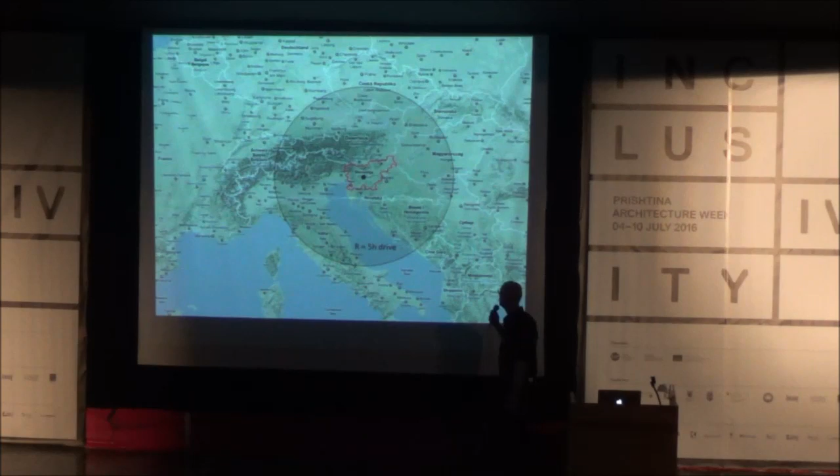We are a very small architectural office in Ljubljana. Tina is the one with the red hair over there. This is something I need to share every time, to understand that we are located— Slovenia is located in Central Europe, heart of Europe, but kind of in between East and West, and also between South and North. So it has a lot of different influences, a lot of different cultures mixing in Slovenia, and I think this is something we all benefit from. It's also one of the reasons— there's this kind of circle with a 500 kilometer radius that you can drive in 4 or 5 hours, and you compound this cultural milieu of Central Europe. So Slovenia, in the end, is a very diverse country, ranging from Alpine to the Adriatic Sea.

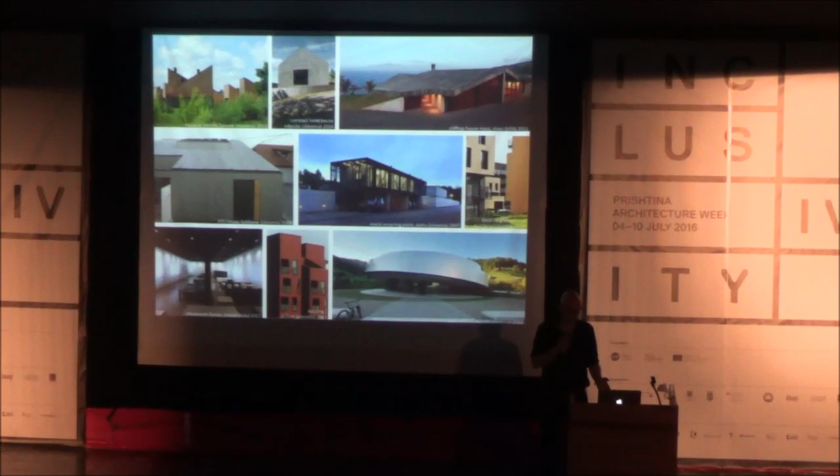If I want to note down the focuses we use in our work: we primarily do design by research, and also research by design. We believe there are actually no standard situations, so therefore there are no standard solutions, and we constantly ask ourselves how to challenge the obvious and how to act beyond the standard. Christian Schittich, the chief editor of Detail, interviewed us a year ago and spoke about the diversity of our projects. He pointed out that this is due to the context—each time we interact with a certain environment, we find a completely new set of conditions, due to a larger or narrower set of contexts. That's why our architectural production, one slide per project, doesn't follow one formal line somehow. It is very diverse, precisely due to that. But what is the same every time we interact with a project is that the process of thinking is somehow the same.

It's our own way of working. We use Sketch as a tool for thinking, but not Sketch as a representation of certain architecture or certain spaces, but more as a diagram, a graphical description of what architecture has to do, or what we are thinking about architecture.

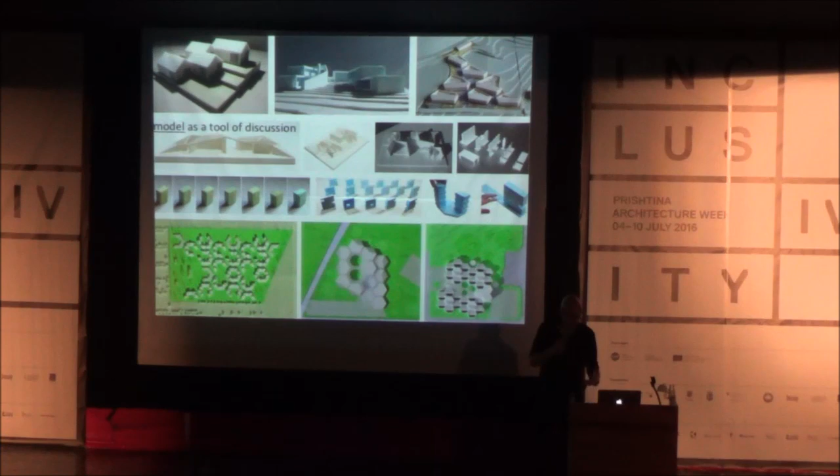The other very important tool for our work is physical modeling. Although we do everything digital, a physical model allows one special thing, and that's discussion. Since we work as a couple, privately and professionally, there are other people with us in the office, so mostly we work in teams. Architecture is thought and produced through discussion, and having a model is a very useful tool for creating that discussion.

The other focus is the user, where we see spatial organization very much linked to social organization. Architecture without the user would not exist, the same way a good book does not exist if nobody is there to read it. So we strongly believe that user experience and participation are our essential objectives.

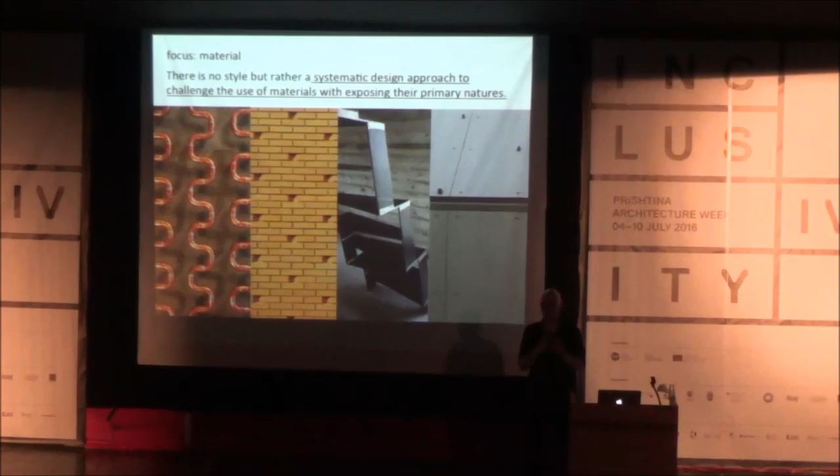The topic of material is very important. I think that was also felt in the context of Ljubljana in the previous presentation - everything you do, architecture is very haptical, so everything we do at the end has some kind of material manifestation. What we do at the beginning of each project, we don't start to think it white, like the modernist would teach us.

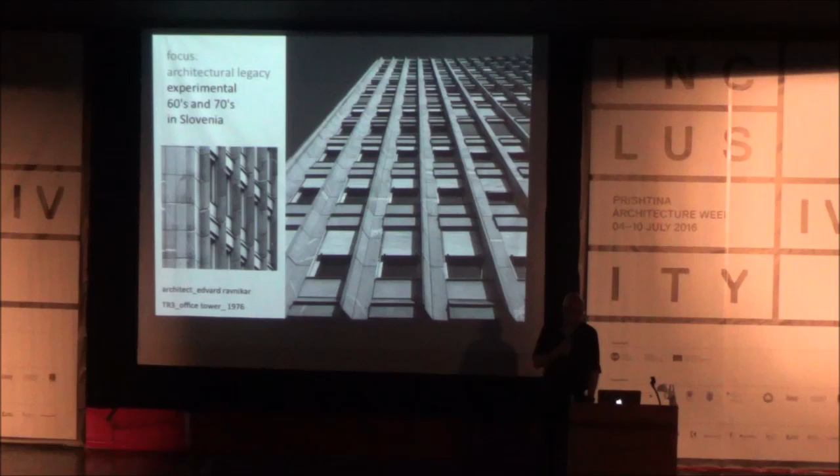Ravnikar is the most prominent representative of that, and as already said, and my slides are overlapping, you can track this facade being as a curtain, simply said, back to the Vienna School and Otto Wagner in Postsparkasse, where you can literally connect to Gottfried Semper and the understanding that architecture can be represented as how cloth works into architecture - this Stoffwechsel theory.

Or for instance another project of Oton Jugovec, which is clearly a modernist building, but done out of absolutely traditional materials in terms of the wooden beams and the hay used for covering this roof. But the structure, the conception of the structure, is absolutely a contemporary thing. So that's quite interesting and brings the notion of Slovenian modernism being a very contextual thing.

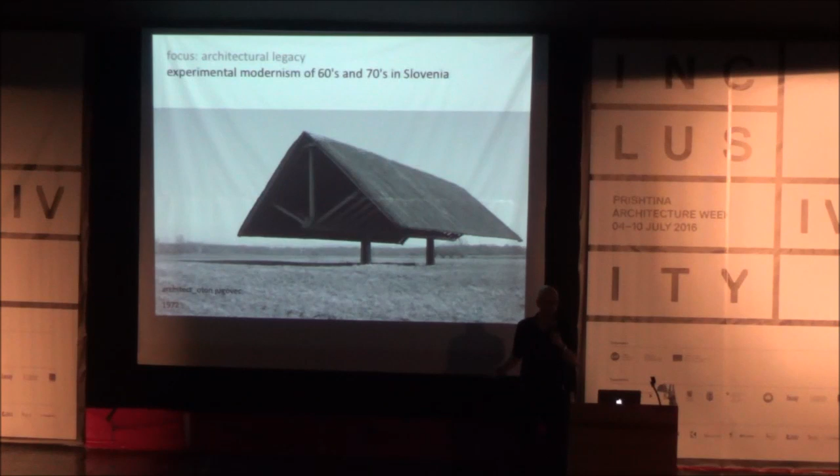Or another one where modernism has set its foot in a way together with the society - Stanko Kristl, who was also one of my professors in the early years of my studies in Ljubljana. He brought somehow poetics and humanity into architecture.

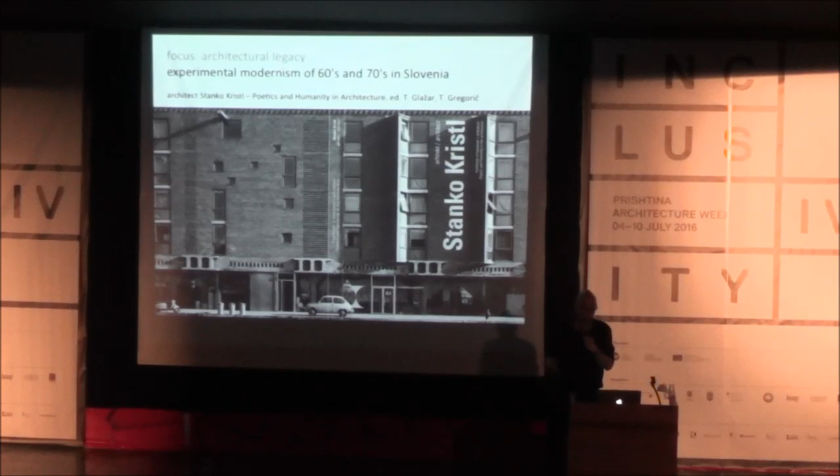Another example of Stanko Kristl, a block of flats in Velenje, where somehow understanding society and how the society works, but also how we feel as individuals towards the space on this kind of psychological level, Kristl was working through that in a modern language.

It was also visible, I think, through the few examples I placed before. Authenticity with materials, something very important. Scope of architecture, relating to the notion that it's from the spoon to the city. And the importance of craftsmanship, which is quite a critical position today when everything we build, we are bombarded with products off the shelf that we're suggested to use in projects, but we still refer to the way architecture was done in that period of time, which was everything related to craftsmanship.

Jumping to the projects, I'd like to briefly show, with a few images, the work we just finished, or that's undergoing - our Slovenian pavilion at the Venice Biennale of Architecture this year. We opened it at the end of May. Tina and I were appointed as curators, and through the office we produced the project.

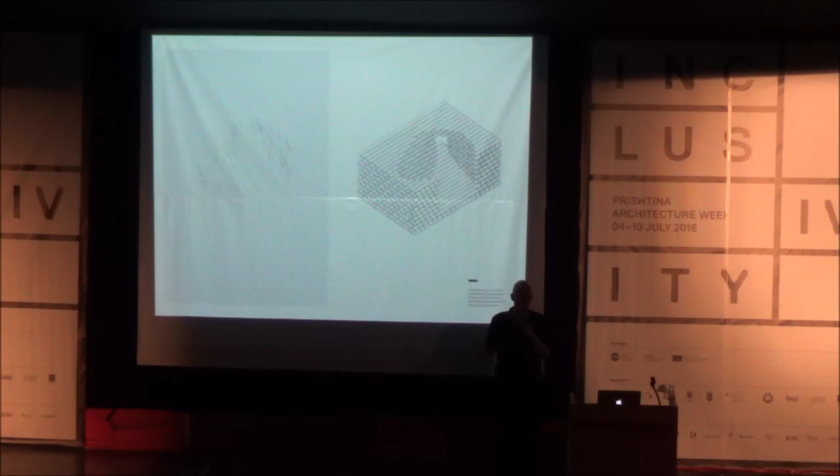The other topic besides curating the content of our pavilion was also, in a way, designing the object that shows the content - that's the other story. This is the wooden pavilion that you see here. Here are the books represented in three-dimensional space, fitting into this cavity.

But this is way too small because it's directly out of the book. What we've done is start to materialize this object that represents the physical presence of the books. We did it by understanding the most basic principle of how you store a book - a simple shelf.

That simple shelf we understood had to be made out of wood, for many reasons, because Slovenia is one of the countries predominantly covered by forest, but also has a strange relationship with Venice - the oaks from the Karst region, the western part of Slovenia, were historically used to erect the city on the water. So there are quite a few relations.

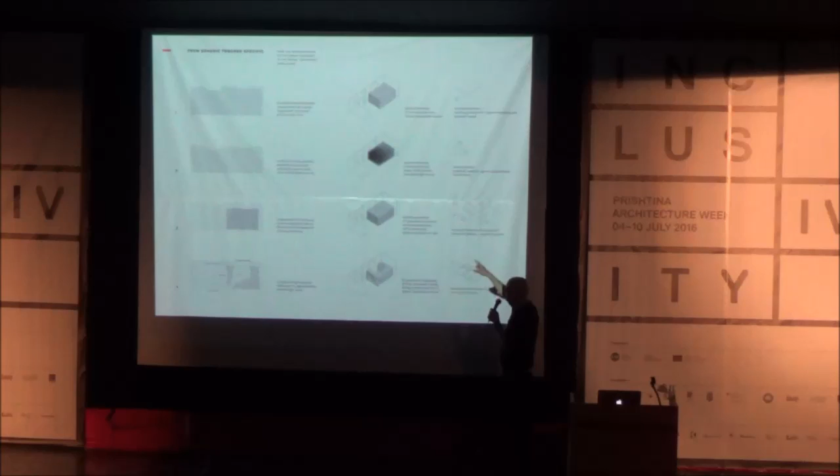We took one generic plank, meant to be the surface to put the book on, and then a vertical piece of wood that creates the space between different shelves. One and the other perform together as a spatial system relating to the context - whether that's the book as an object, or the context of the Arsenale where our pavilion is located.

I wanted to bring in another reference to modernism, or the critique of modernism - a step in between, by Alison and Peter Smithson, in their patio and pavilion project. They stated that patio and pavilion represent the fundamental necessities of a human habitat: the first necessity is a piece of world, the patio, and the second is an enclosed space, a pavilion. This relates to what defines our home.

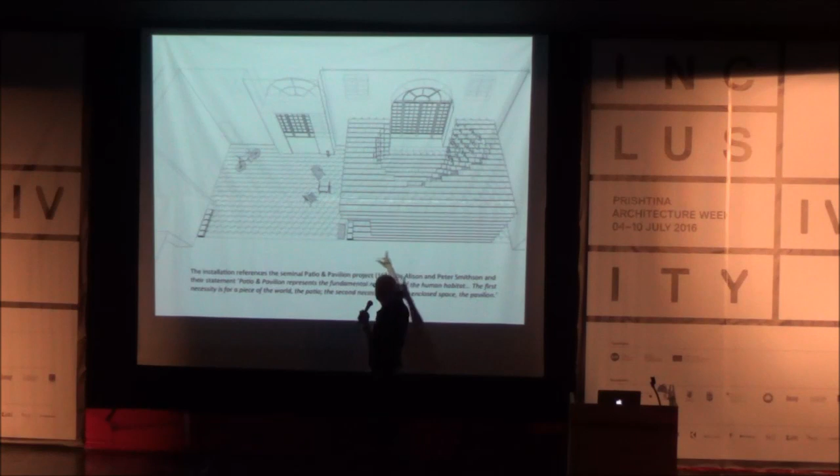So that's what it is there - the patio as the empty space, and the pavilion housing all the books, an abstract representation of home. But at the same time it also directly relates to the window of the Arsenale, although our building, our space in Venice, was completely plastered.

All the walls were plaster, as the opposite of all the other ones, which have these kind of rich materials, the walls out of brick, very old and very expressive. We have had the plaster.

So the first thing that we did, we kind of took this knife and made a Gordon Matta-Clark gesture in order to cut out of the plaster the window, which became our very close and related context. But it's also, in a way, a metaphysical relationship, because we kind of brought the light into it. And then here, maybe you can relate the light to knowledge in a classical sense.

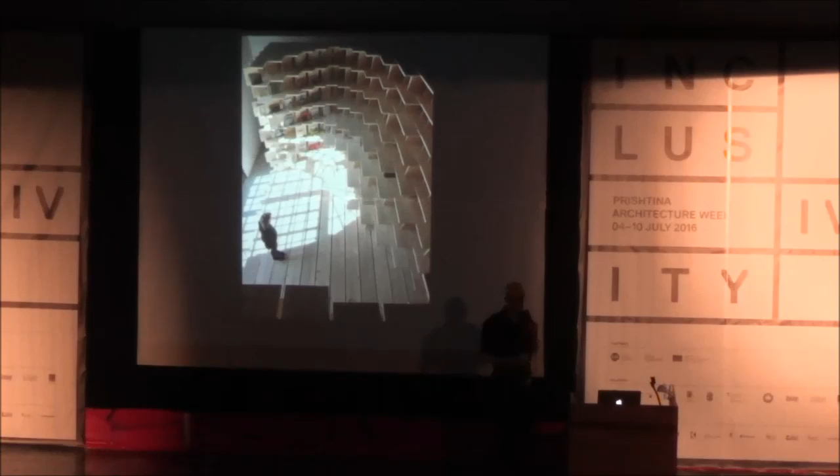So the light literally carves out the space of this three-dimensional pile of wood that starts to perform as a cavity where all the books become this kind of usable library. But as well, the light penetrates through the structure.

Whenever you move around the pavilion, you always see the source of light, because all of the verticals, they're pointing to the way where the window is. So in that way, you have this kind of representation of the wood, in combination with light, which is a direct, let's say, form-generating system.

Into something like that you find out when you go to Venice, and you can sit here in different ergonomic positions in order to reach the book that you want to read and browse through its content.

Okay, that's it about the Biennale, and let's go to the first house. This is the first project we have done together, Tina and I. I think it was built, it was finished 12 years ago.

It is an urban shed, an urban holiday home, in a way a pied-à-terre for my parents in Ljubljana. Ljubljana, in a way, started as a Roman city, and then a medieval city, and so on, also through the Baroque and modernism.

But the situation where we found ourselves is here. And it has quite a strange layout, because this is the structure of the village, so-called Krakovo, and the School of Architecture is over there, on top of this block.

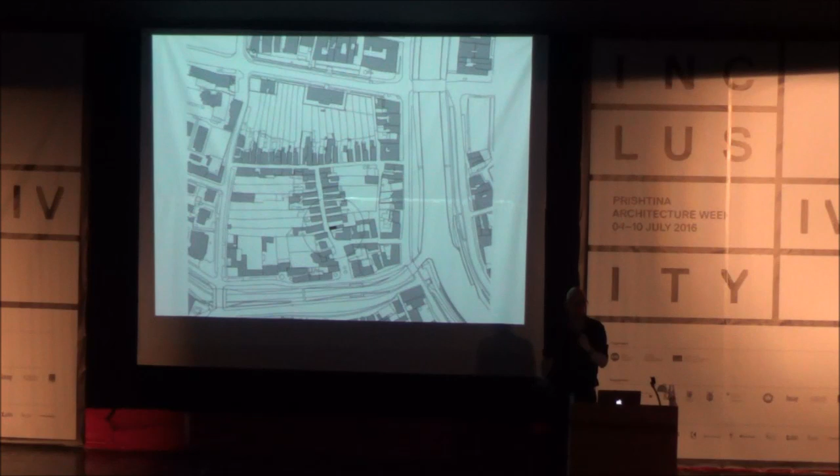So nowadays, when Ljubljana outgrew this situation, this became part of the center, and also the population within this little ambience changed from farmers to city dwellers somehow.

And we were confronted with this kind of situation, although all the neighboring buildings are these old farmhouses, which are protected under National Heritage law and committee. So we were fighting, in a way, for two years in order to persuade the National Heritage Committee.

That we do not need to actually reproduce something which you see on the left, but we can actually tackle our service shed with a contemporary approach in order to bring something much more suitable to the environment, not just a fake reproduction, because this is half smaller than a typical house, and it has a totally different type from the outset, and so on.

So one of the challenges that we undertook was how to bring direct sunshine, the light, into the building, since the service building was oriented exclusively to the north, so no windows on the south.

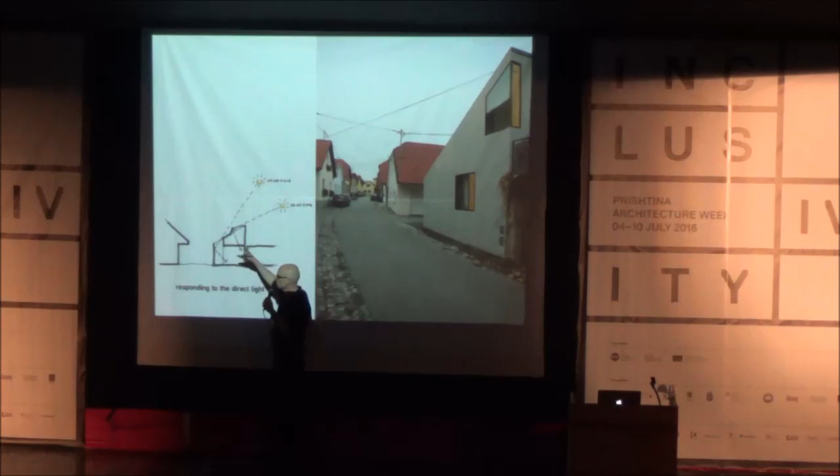And the other challenge was how to actually get a little bit more room on the upper floor, because we wanted to exploit this little volume as radically as possible.

The whole building only has like 42 square meters altogether. So we made the gesture in order to create this bump on the roof.

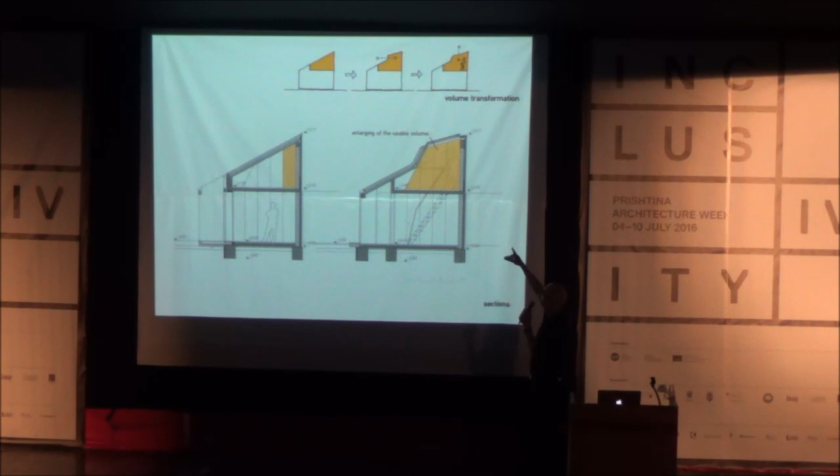But in a way to reverse the typical element that usually is allowed there in order to have more room, but not to have the view as would typically be done, but something which is on the rooftop in order to bring the light in.

So that was the only exception that we were legally allowed to do in terms of expanding the volume.

And you see clearly here the reference of what they allow and how we kind of abused that little extra volume that we got.

This is something we are proud of because we designed a detail of a flush-with-the-facade glazing, which is in a way a very contemporary detail you can see everywhere, but in reality is a quite direct reference to all of the windows of those typical farmhouses that were in this area before.

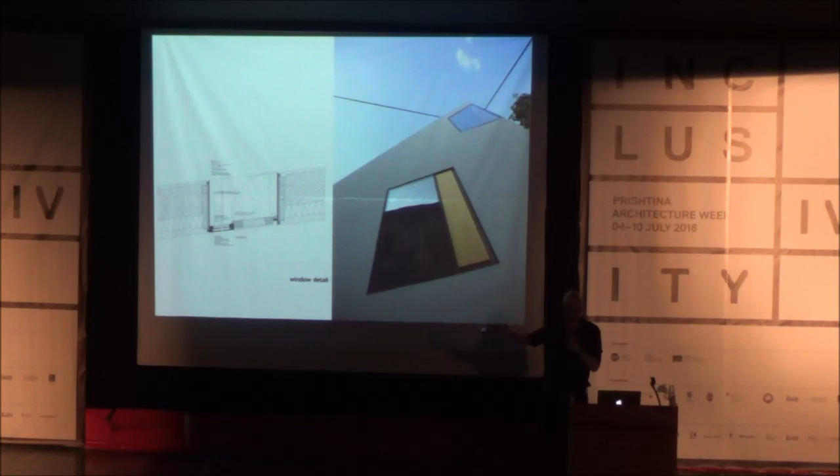Even the window you see here in this reflection has been changed 5 years ago with an off-the-shelf plastic window recessed inside the volume of the building. So in a way, now in the historical area, a contemporary interpretation is the only memory of the windows that used to be there.

Interiorly, as this was our first build project together, we have been very careful about what we were using as materials. From exposing the concrete where it was structurally needed, to using terrazzo flooring as a reference that we are in Ljubljana, still on the Mediterranean.

My parents are from the Mediterranean part of Slovenia. But also understanding how to bring the staircase inside, since it's a very small room and we needed to access the upper floor.

The staircase was very short and steep, so we used this situation, sort of samba stairs, that we actually found a reference in Plečnik's St. Michael's church that Vlado was showing in one of the slides.

But at the same time, the staircase is not something which would be purely a service element, as you know, the tool to come one floor up, but it also plays this kind of sculptural role.

And as we were educated by our professors, who were still deeply rooted in modernism, we were thinking of these stairs at the beginning totally in white. Only when we came to the workshop where this craftsman was making the staircase did we understand that it would practically be a crime to paint the staircase white, because the design would still be there, but all the notion of how this stair was made would be completely deleted.

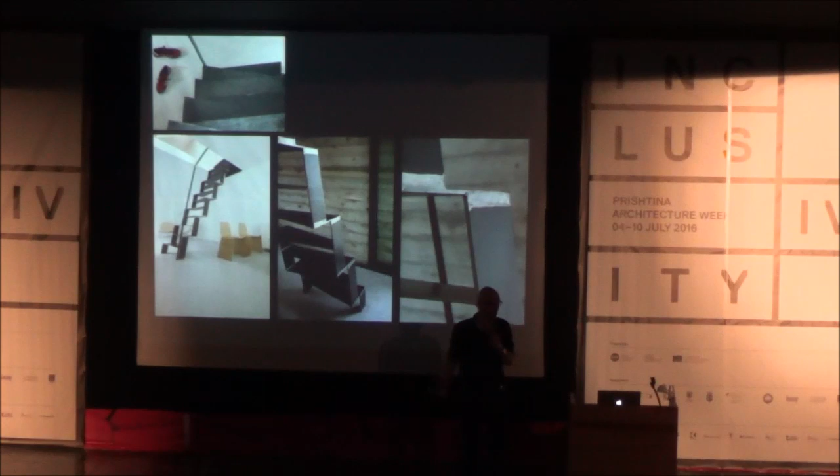So it was maybe our first epiphany, in the very beginning of our career, that the material has to play an equally important role as the form, the function, and so on. So you clearly see how the stairs are done.

And then we experimented on the upper floor using simply plywood, a very cheap material, just screwed to the floor. And we have been doing quite a lot of elements of the interior with the same material, using the terrazzo which is on the floor also for other elements like the sink and so on.

And yeah, this building was, for a few years, also an afternoon kindergarten for our son, who is there on the picture.

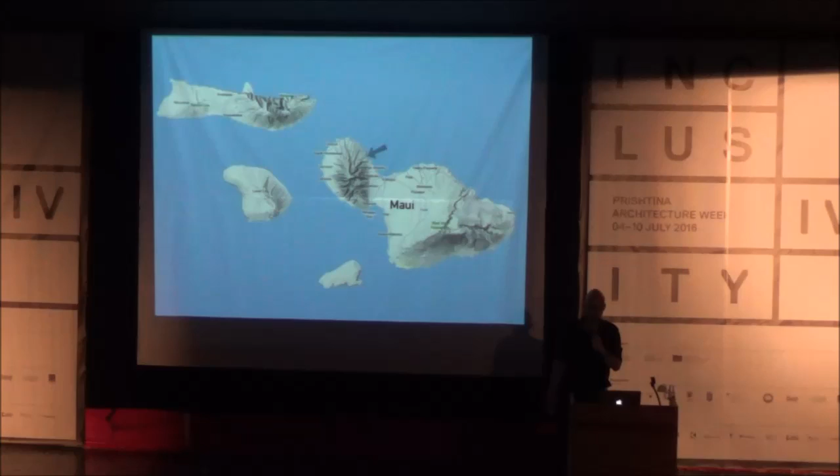So now we are moving to a completely different part of the world, which is 12 hours time difference, on Maui, the state of Hawaii in the USA, where on the north shores of Maui we had an opportunity to design a home for friends of ours. This is Robert Stroj, half Slovenian, half Croatian, raised in Zagreb.

But then, due to the political situation, people from my age who were either in Croatia, Serbia, or Bosnia kind of fled away. And he went into the world. He was a very good windsurfer, and he started to work on windsurfing sails. Slowly he became better and better, and nowadays he's running a research and design studio for NeilPryde. And of course he has to be in Maui, and that's practically his office somehow.

So what we got from them was a reference and a very short brief of how many spaces and what they really wanted. A very short brief, but this reference was quite important for us — the Walker residence in Carmel, by Frank Lloyd Wright. One of the things Robert emphasized that was important to him is that the floor plan is not a set of orthogonal walls, but something that creates a different kind of spatial dimension inside the rooms.

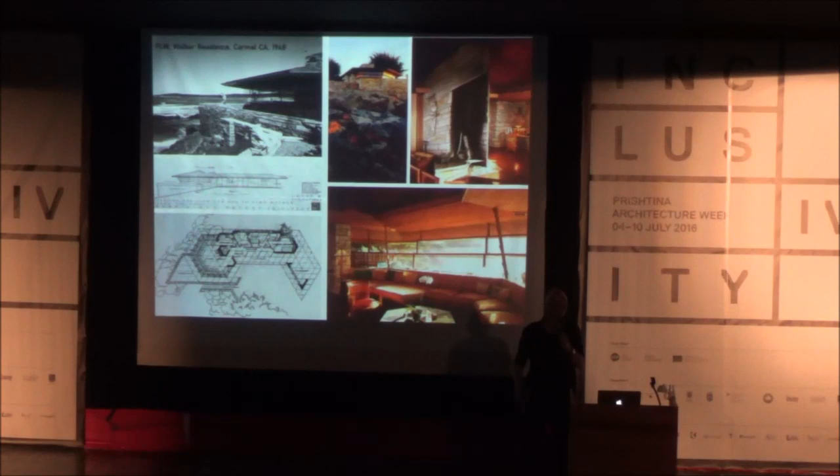So that was the site, and we felt in a very strange situation because we couldn't really address how to start the process of thinking. Of course, the first thing we did was go there, because as Europeans we have to understand the context. Although the context was kind of ambiguous for us, because there was nothing built around that we are used to in Europe. But being there, we started to understand that the context, although not visible, is very influential.

And that's actually the wind, the sun, well, all the greenery, how it grows, and all of these things. So coming there, we started with the first sketches where the view was playing the main role, but also a first representation of volumetrics, of how to actually work through the house.

One thing which was pretty obvious is that Maui is pretty much not a very urban area, and all the people are actually socializing at their homes. They do not have squares and pedestrian zones and stuff like that, since it's a very American influenced society.

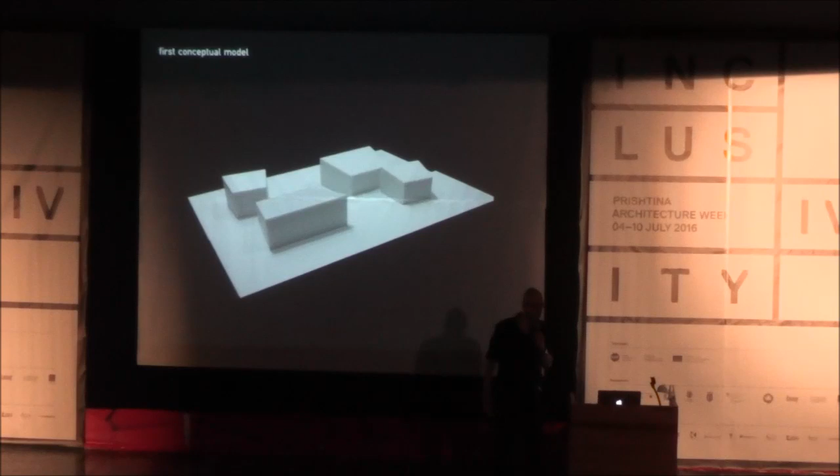So we understood that this home has to also work as a social venue. We started off in a simple bottom-up process to provide firstly the individual spaces which are in complete privacy. Those are sets of bathroom plus bedroom volumes where you can put your really intimate, private functions, and spend private, intimate life in there.

But everything which is in between is this semi-public situation of your normally private home. But at the same time, it's also very fluid space, so the nature can actually go through.

We've been doing quite a lot of experiments with how to fix the roof somehow, because it was really kind of bottom-up process, even literally. And then we figured out that the roof has to play a role of the landscape. But we didn't want to be too literal about it, because otherwise we would just kind of put the earth on top. But the roof, still, it is representation of architecture, especially of architecture of individual home.

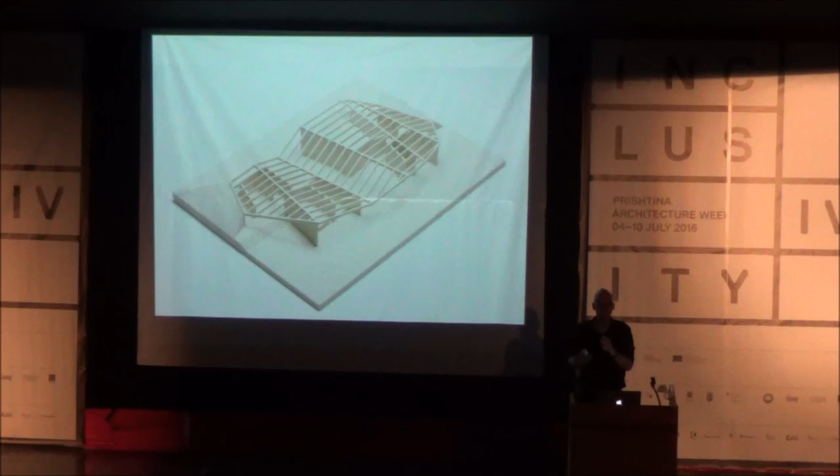So when we go home, we primarily identify ourselves with the roof. So the roof has to be there as an identifiable element. So how this house is working is that it can work as a large home, where you see the master bedroom and two children's rooms.

But at the same time, it also can work occasionally as a mini hotel, where each individual volume works as an ensuite room. So yeah, technically these are the private spaces of sleeping and bathing and so on.

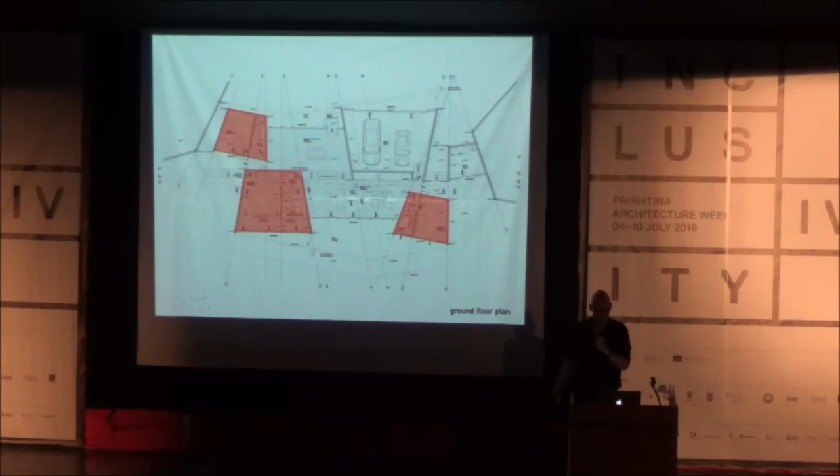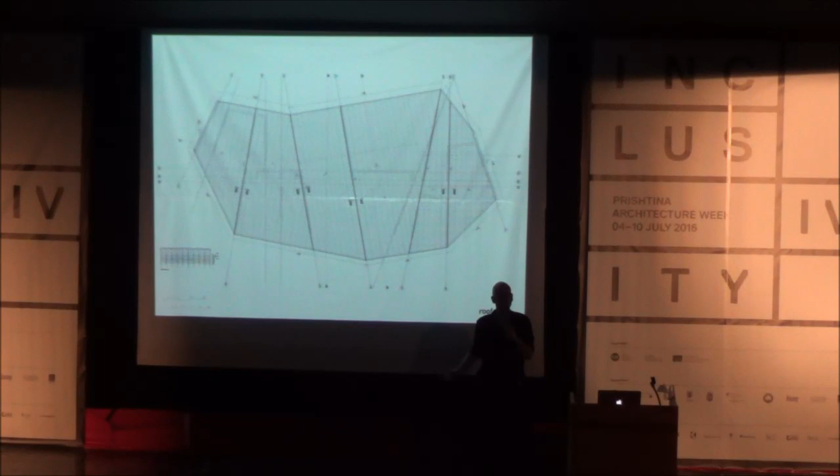These are the services and the space in between, which is meant for socializing and being part of the outside as well. And on top of that, it's a roof which simply doubles the surface of the indoor house. So what we have there is 200 square meters of indoor spaces, but also 250 square meters of outdoor spaces, which are covered for the shadow.

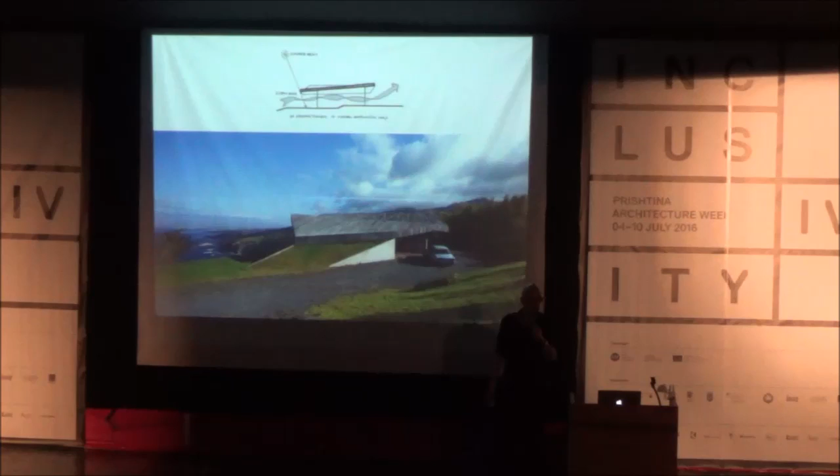So the building represents itself with the roof and maybe nothing else. It's a very difficult situation in order to take a picture of the building, because it does not have a representation of itself from the outside toward in, but it works more as an experience of architecture from the inside toward the outside, the same way as it was conceived.

So you have this situation where you can be hidden from the effects of the weather, but at the same time you have the transition to come out and to expose yourself, or you have this kind of membranes out of wood, where you mediate the privacy and the public spaces on the terrace. Or you have this kind of simply transparent, with sequences, socializing space.

When you come to visit them and you park the car here, you immediately see the ocean, and maybe even in the winter the whales jumping out of the ocean, like a very scenic view. So immediately, before you even enter, you already experience the main asset of the building.

And the spaces that are kind of fluid around these private volumes, they are completely defined by the same material on the roof and on the floor. This is ipe wood, a locally based wood, the tree which normally grows on the beach, but this specifically, since you can't cut a tree on Maui, it has been shipped from Brazil, which is a downside.

But this is how the society in the States works. And the volumes which are plastered, they clearly define their presence in this interior room, with clearly the views that are kind of staged towards the ocean and other specific parts of the environment.

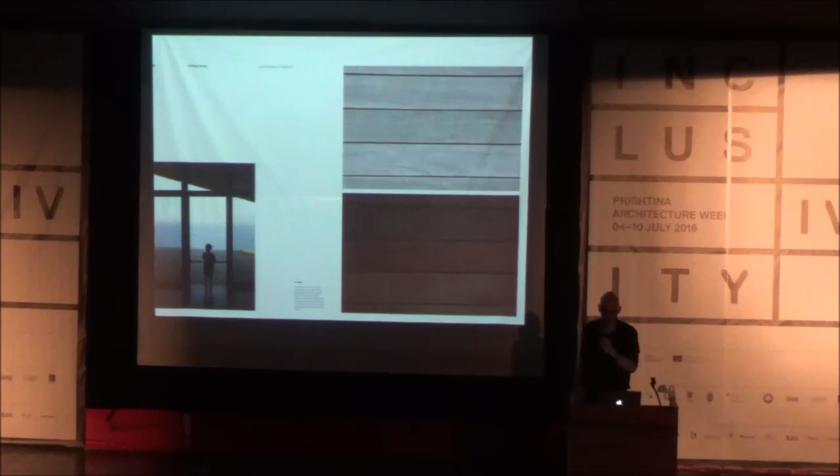And that appearance is somehow very much relating to the chromatics of the neighboring cliff. The stones of the cliff, somehow the wood starts to look very similarly like the stones of the cliff. So in that sense, the whole building is in a way kind of blended within this environment.

So we are moving back home, to the karst region in Slovenia, western side, where we have designed another individual home. This is Vrhovlje, the land of pršut and teran, in a situation like that.

You might know that the karst villages, since the karst was due to Venice completely bare of trees, and the erosion removed all the earth, the stone was the most representative material, but also ambience of the karst region. All the villages that have been growing here started to grow in a very compact form in order to protect themselves from the wind, which is burja, a kind of very harsh wind blowing in the karst area because there were no trees.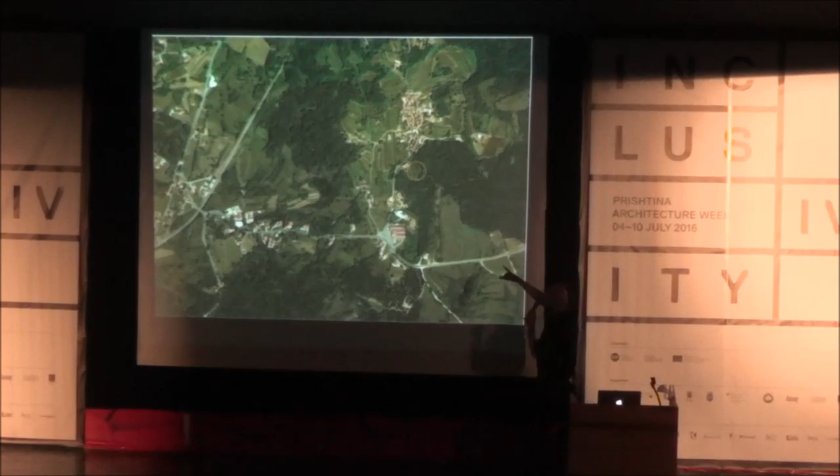But our situation was here, a little bit kind of offset from this village. This is the typical village that you might know, Štanjel, where Max Fabiani was building quite a few buildings or renovating them. And our situation is not so very different.

So what we learned from the existing is that this is the typical karst house, which is one of the jewels of national heritage. This is the one which is very close to our location. But you see that the typical karst house is practically a manifesto of monomateriality. There is nothing else but the stone. Even the water ducts are kind of crafted out of the stone.

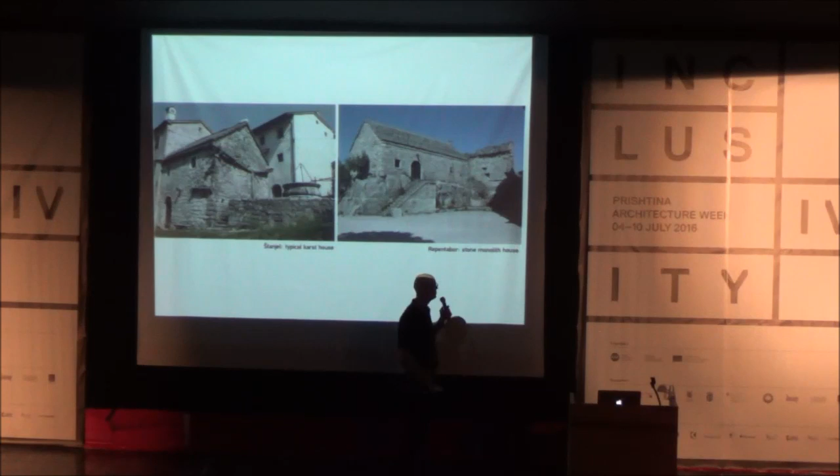Similarly here, with this kind of reference that we took for our building, it is quite clear the representation of stone. But the second thing, which is quite important for the karst region, is that there were no big volumes. All the volumes were relatively small in order to contain the life within the wild nature.

So our first decision was to design a house which had, again, almost 300 square meters, the long list of the client, and we have designed it with several much smaller volumes that were kind of contextually sized to the scale of the village.

So it was supposed to look like that, like a house as a mini village, and this kind of a monospace interior with this kind of ambition of lighting and so on.

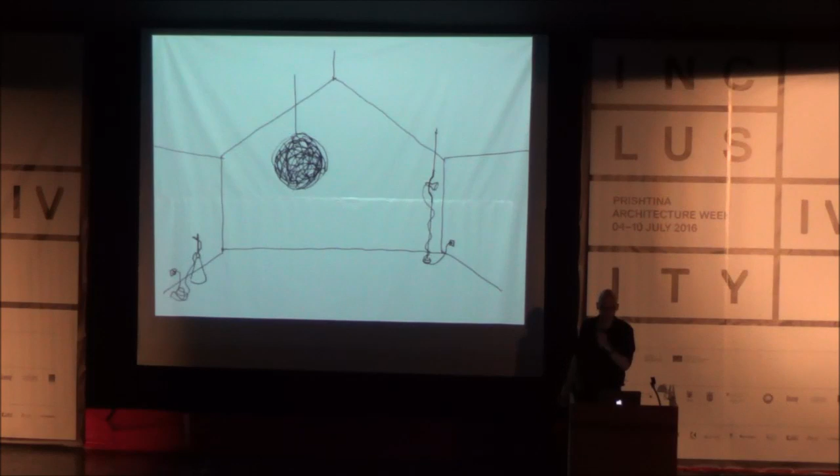But what happened was year 2008 and Lehman Brothers and the financial slide down. So our client couldn't afford anymore to build this house, and he wanted to kind of forget about everything. And then we persuaded him to buy this little plot, which is just around the corner of the road coming up.

In order to do an experiment, to do a much smaller house, but according to all of the details, material usage and everything that we had planned in the bigger house, this would be a prototype for his living. So we would gain much faster completion, much smaller budget, and an experience in order to maybe eventually, when the times are better, go back to this one and realize his home.

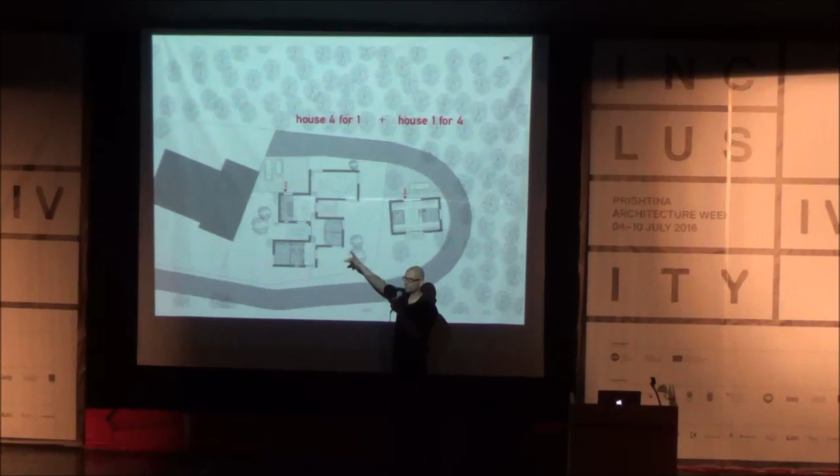So now we are in stage 1.5, because he has got another child and he wants a bigger building. And we said, okay, finally we can do this one. He said, no, with this one I have learned something, so I want a different one. So probably we're going to design the third one.

So the small house, compact karst house, looks like that, it's in a way a very simple layout as well. The ground floor with all the, well, traditionally ground floor the living and upper floor sleeping, but the open space developed crossways with two big openings, and the programs developed in the longitudinal way of this little volume.

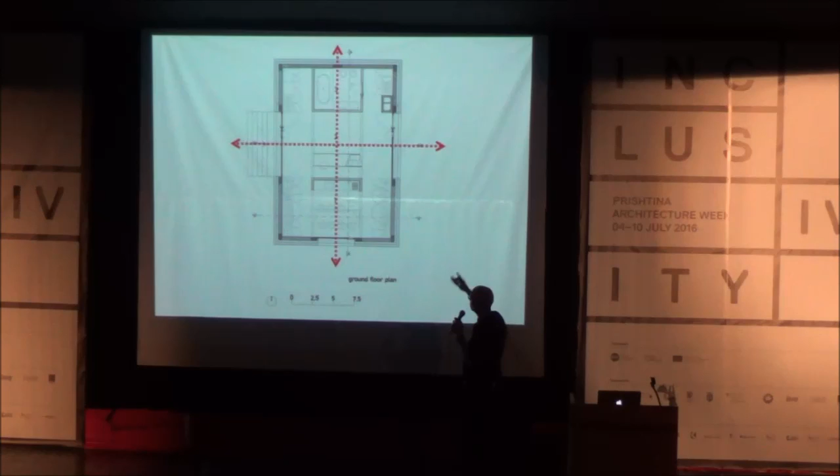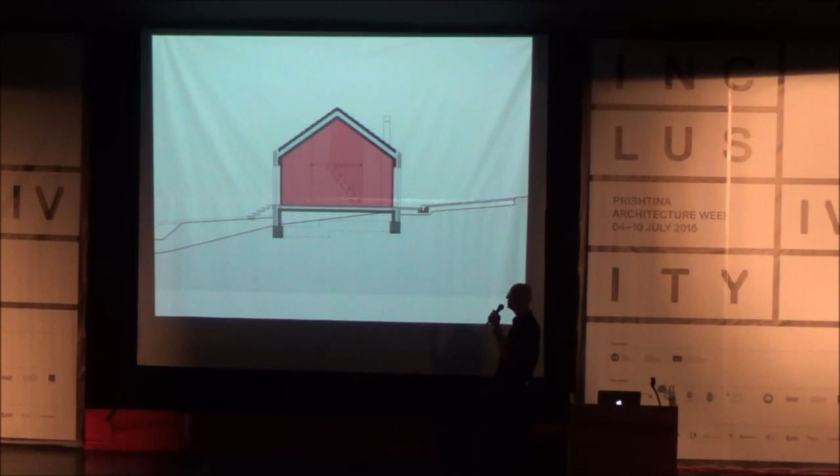And on the floor upstairs, two very small rooms that are kind of, again, enclosure of the privacy, and the shared space in between. In the section, quite clearly represented, the shape of the house that you can experience from the outside you as well experience in the inside, but you also have the same kind of reference to this archetypical house also in your private space when you are sleeping or waking up in the morning.

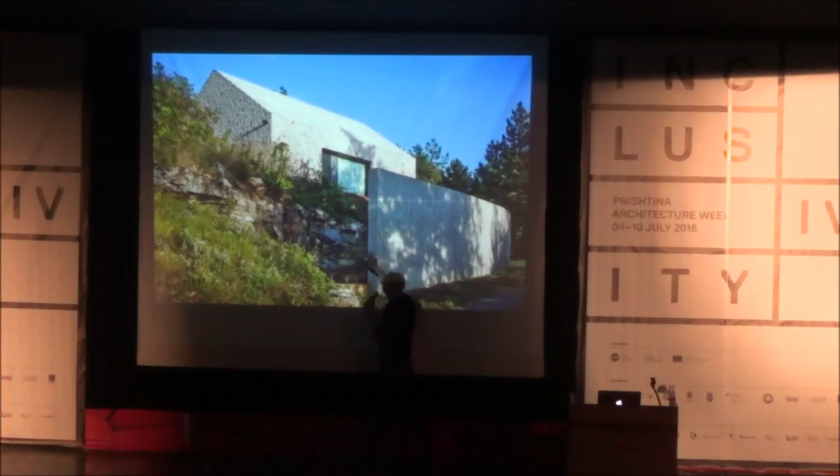So how the building manifests itself within this land of stone. As soon as you start digging a little bit, like 20 centimeters, you reach full-on monolithic stone structures, wrapped with this wall, which is an element very clearly defined in traditional karst architecture, but the house as this kind of monolith is done in a contemporary way of reinterpreting the typical usage of stone in historical karst houses.

We also used this not as old masonry knowledge with a guy who would know how to build stone walls, but we used it as a cladding. So this is a combination of concrete and stone, and we realized this kind of wall as a cladding surface to the facade.

At the same time, we made an interpretation to the typical roof, which is cladded out of stones, with thick stones, taking the artificial stone, the concrete, but doing it dimensional-wise and structural-wise the same way as you would find in a typical house.

That's quite interesting and works very well, because normally you would have strong rain water pouring out of the gutter, but since the steps are done this way, each time the water loses all the kinetic energy coming from one step, and the speed of the water starts from zero at each of the steps, so it's clearly pouring inside the gutter without overbridging it.

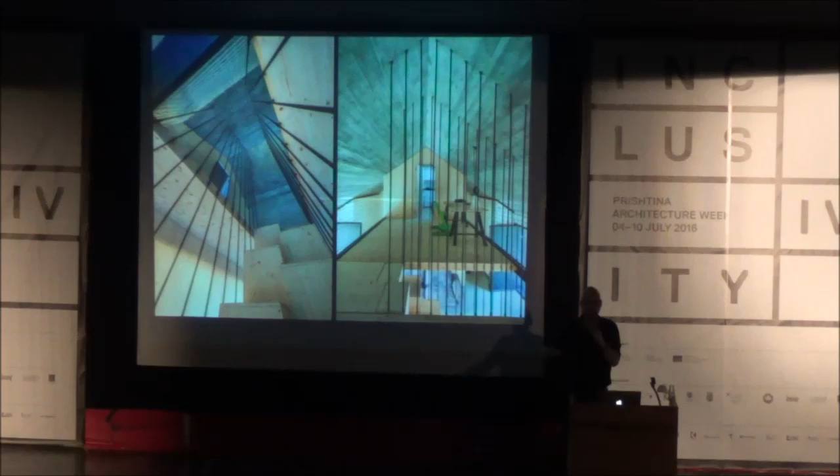But coming around these boxes where there is a kitchen, on the other side of the ground floor is a bathroom, and slowly coming up by the staircase to this area, which is a shared area between the two bedrooms. The shared area is in a way a control dock of the whole house - whenever the kid is sitting here, he knows everything that is going on throughout this little volume.

And then again, entering the private spaces, which repeat the story of the building, their representation of a typical hut, is visible from the inside as well as from the outside, where you understand that your room is actually an equal entity as the house.

So this is how it is in twilight, with another experiment, how different materials under the same weathering conditions start to acquire very similar chromatic effects.

So we are now finishing with the last building, the last individual house, which we have called Chimney House, and it is in Logatec, somewhere between the Mediterranean part of Slovenia and the continental part. Logatec is the area where all the carriages coming from Vienna to Trieste were normally robbed, because it was full of woods and full of robbers somehow. That's the condition of the little village.

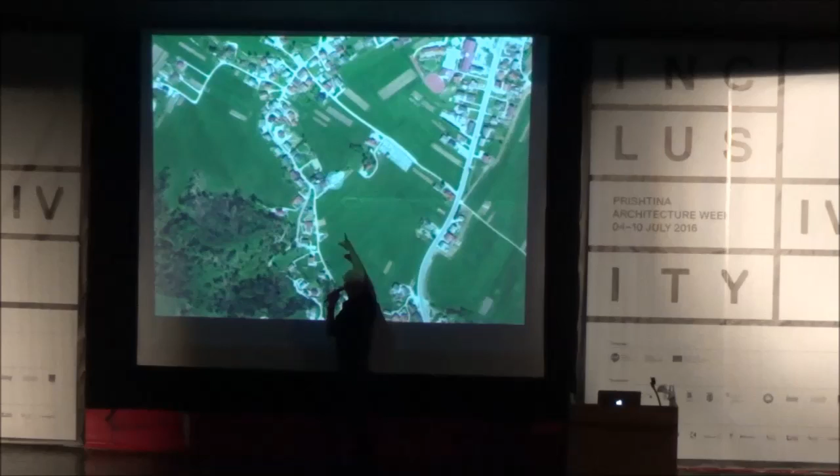And we have our spot over there, and it is again a negotiation of how to define the edge of the village, which is very heterogeneous, but also how it relates to the little church, which is practically nearby. And the situation of our users, our clients, was that...

She is at home, she's not working, and mostly they are using their kitchen all of the time. And also during weekends, quite often - maybe there are exceptions, like twice or three times per year where they do not - they invite friends over for the weekend for dinner or lunch or whatever. So the fire in the house was running almost all of the time, even in their previous house. And they have this habit of not cooking with contemporary appliances, but they have this old-fashioned cooking appliance that you kind of do - you actually burn fire with wood.

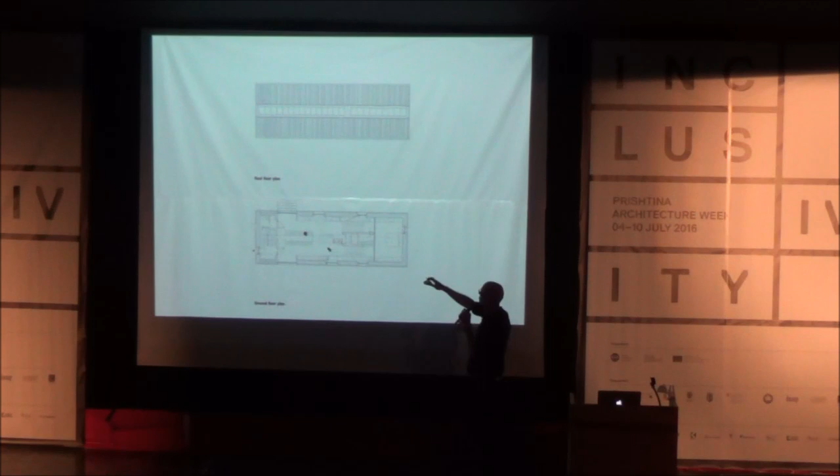So the chimney was clearly something very important for a representation of their way of living. And we introduced two elements: something which is a generic type of house that you can find in the neighborhood, but at the same time a very specific element provided by the users and their way of living, in order to bring out something which is already specific. So that informed the complete section - that chimney actually informed the complete section of this building, an extruded form of the chimney, in order to provide this kind of volume.

But at the same time, this kind of church from the 16th century was also a very important context to us. So strangely, they start to speak similar languages.

Thinking of that, they became specific with the same procedure. So this chimney house has got a specific element, which is a chimney that informed its specificity, but in the same way the church is just a combination of something which is a very typical reference to the type of the house, and the ecumenic element that represents its specificity.

So these two buildings play some kind of dialogue between themselves, but at the same time, the building also concludes the edge of the village, which, as I said, is very heterogeneous, but this is more representation of maybe this service type of buildings that you find in the area.

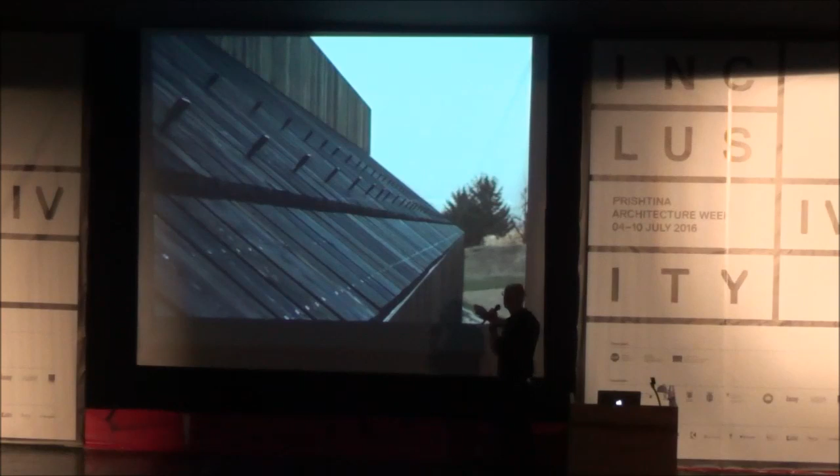Since the surface is in a way becoming from a wall to a roof and again to a wall, we simply decided to use the same material running all around. But the facade is not something that you see from the outside, it's a very thick element as well, something which is in the middle that is produced by the chimney.

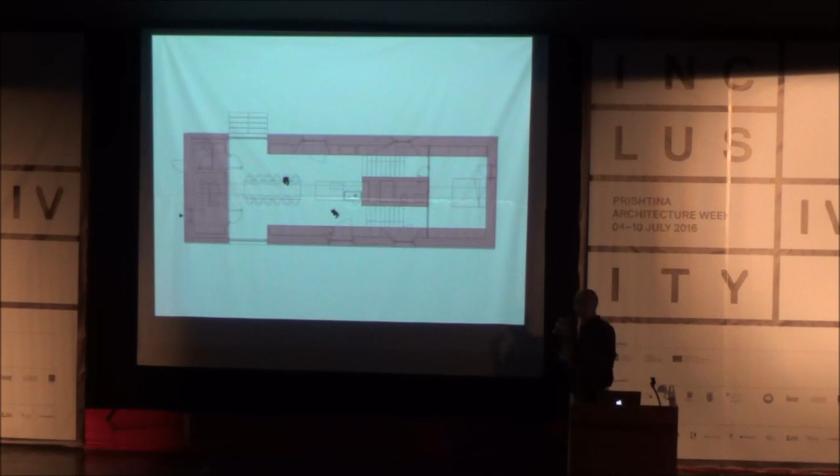All of the services and other spaces that we have got in this house are distributed around in order to provide this thick wall, which of course has the role of enclosure, protection and insulation, but also the role of programming these lines.

The punctures through the volume are very curated in terms that they reproduce this transversal ventilation, or maybe the view, as you see here, from indoor starting to become outdoor. At the same time, they also modulate the light coming in, in such a way that they allow some views to be spread both ways.

So in a way, this oblique situation when you meet the window is repeated from indoor and outdoor. As the outdoor provides you a certain possibility for views, the indoor already becomes your niche, your programmatic niche, that you can use for your own mini private space, if you'd like.

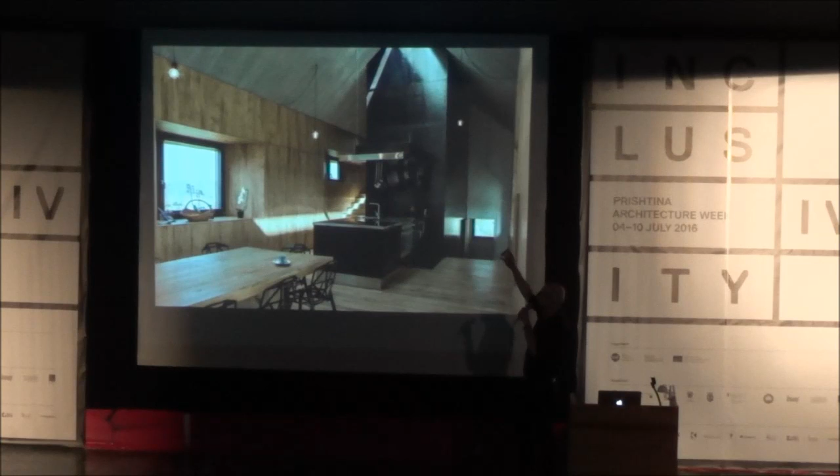Represented materially, whatever you can touch, either with your bare feet or hands, is related to wood. But when you come to the ceiling, which is not in reach of your hand anymore, it starts to change material to concrete, but with an imprint of all the wooden planks. So the structure is the same, but the material is changing.

Ultimately, to meet the narrow window on top, the split gap of the ridge, you can clearly see the chimney coming out, but at the same time, the light coming in, maybe in this kind of church-like scenery. This is simply repeated along the axis of the house, also in their bedroom.

On this image, I'd like to show that the structure of the material, the texture of the material, runs throughout, but the property or origin of the material is changing, with the views like that throughout the house, with the most important reference to the sky as the light source.

So now we are switching to the work environment, and I'm showing two projects. One is the one we have recently finished, the uncurtained office in the center of Ljubljana, just overlooking the three bridges of Plečnik, which is in this building that you see there.

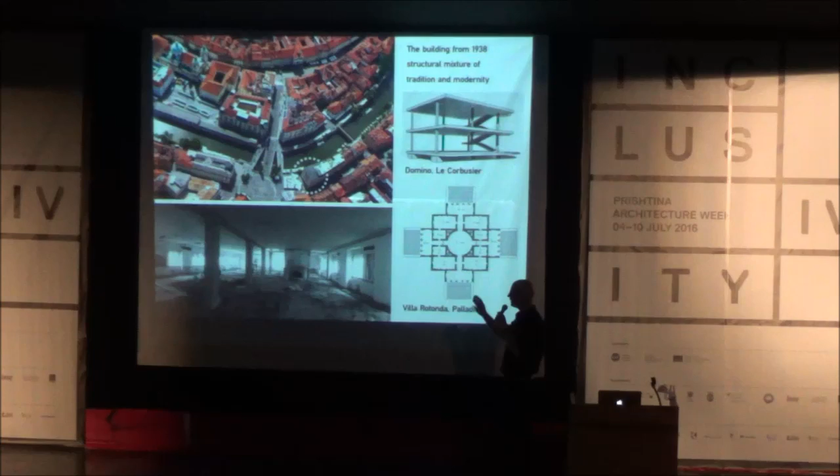We confronted ourselves with this empty space. It was just that some people moved out and left it like that, more or less. It was interesting to us that this building is somewhere in between—it's a representation of a contemporary icon, structural-wise, but also of the classical icon. So all the walls around are thick and load-bearing, but you have this strange line of pillars in between that is produced out of concrete.

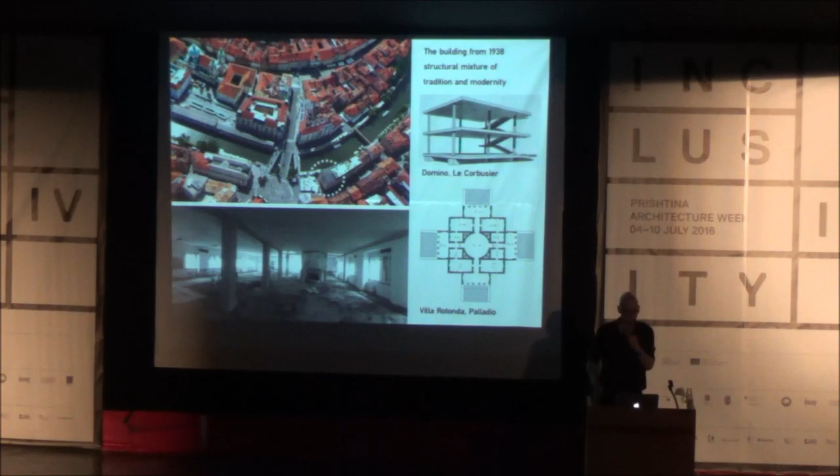The other thing which was very informative is that this open space we had was supposed to be filled with different companies. The client has different business entities, and they were totally different in how they were working. Also the working hours were quite different from one another, and the type of office they would need was different from the cubicle situation or the open plan.

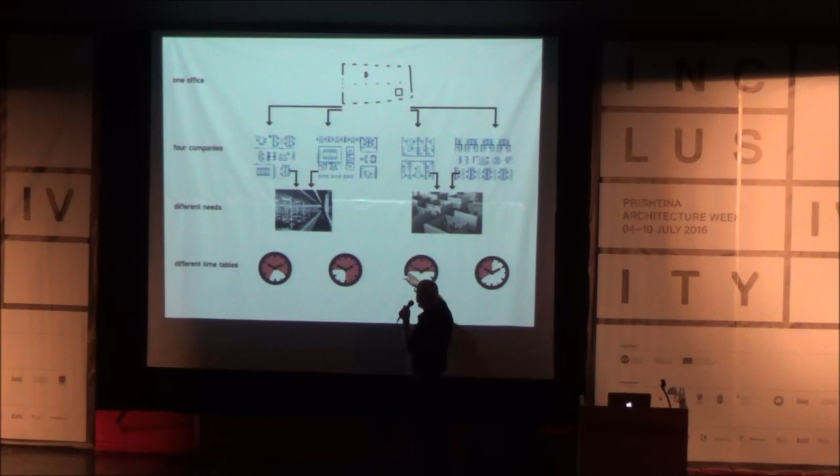So what we understood, which we presented here with Jacques Tati and Frank Lloyd Wright, is that we had to create a very versatile situation—one that can either change during the day several times, or host different kinds of work organizations during the year, when one company is dying and another one is starting up, and so on.

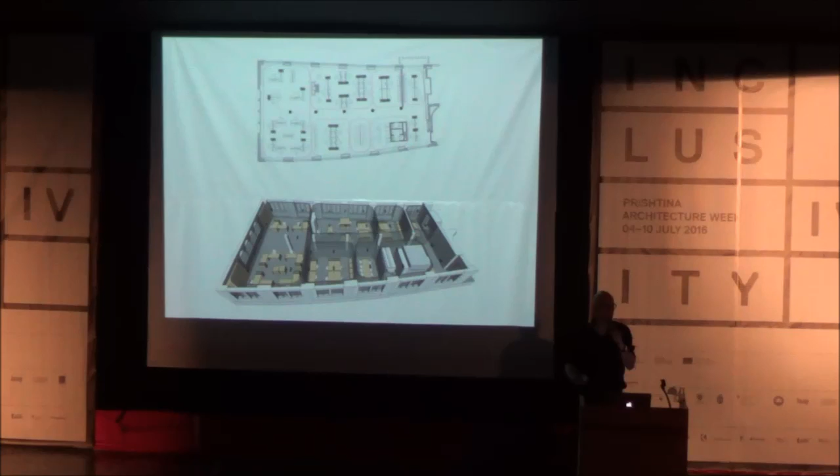So we have distributed furniture all around, but for all the partitioning we used something very flexible - curtains, rather than fixed walls. What we end up with is an office completely saturated with curtains that can suggest something traditional, like a corridor, or a conference room enclosed for privacy. But very soon it can change in a matter of seconds into something completely open that starts to communicate between each space.

So this is the table in the conference room that, once you uncurtain it, becomes a dining table related to the kitchen. The kitchen isn't just a small one for coffee - you can actually do a full five-course lunch here. It's a fully equipped kitchen that also influences the office space to be much more convenient, or more like a domestic space at the same time.

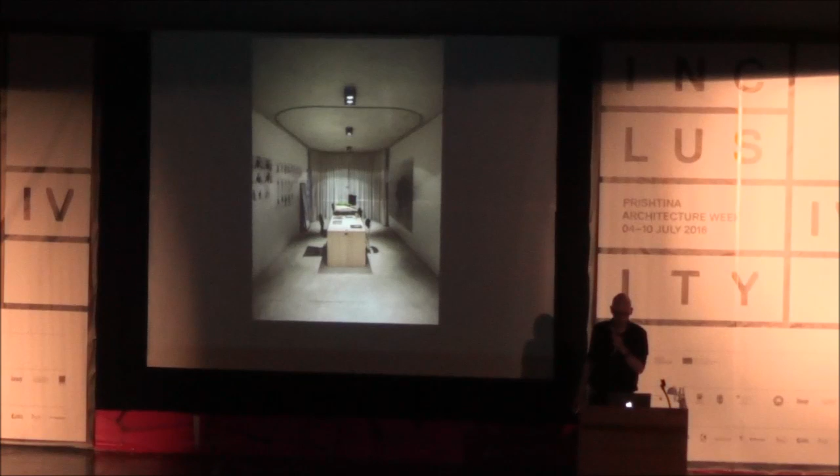So starting from a scenario like this, you can slowly change it into something where you privatize yourself within your business entity. Or something like that, when you find at the entrance it becomes something like this - before belonging to the outside, now belonging to the inside.

And that versatility was really exploited at the opening party, where they improvised a pop-up boutique in that same space where you could buy some fashion designs, and the catering was produced there too - that same meeting table changed into something that dines.

All the curtains are made with thick felt, so they provide a certain level of acoustical barrier. And when the curtains are uncurtained, you find all the traces of the rails on the ceiling, which suggest how the office can be subdivided in relation to the concrete floor.

Then there's the fiber used for reinforcing the pillars, because the concrete pillars were done very early in the stage of modern structural thinking. They were insanely thin, without any pre-stressing like Ricardo was doing - just simply poured on site. So we had to reinforce them with carbon fiber, but that's also part of our visual repertoire, because it's something you wrap with fibers, just as the curtain does.

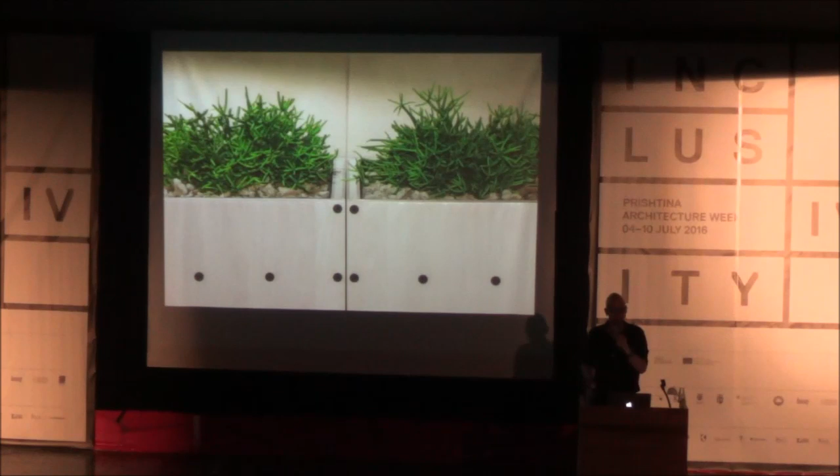And the furniture is selected so that each person sitting in that office has his own private garden. We planned a spice garden here so they could actually use them for cooking, but they said it required too much attention, so they switched to something self-sustainable - not plastic, but still growing.

So the other entity - well, the last project actually, this is the last project, perfect - which I want to show is a cultural institution. No, look, I was actually told this was going to be at 7, and I thought I'd have a little more time to prepare.

So that's another project relating to work - a metal recycling plant in Piłka, again something totally remote from any built context or tradition. The client wanted one huge plateau for his open-air recycling facility. Since the waste accumulates very fast and in large quantities, the plateau was the major volume of this project. But we also had to design some buildings, relatively small compared to the big plateau, to house different programs.

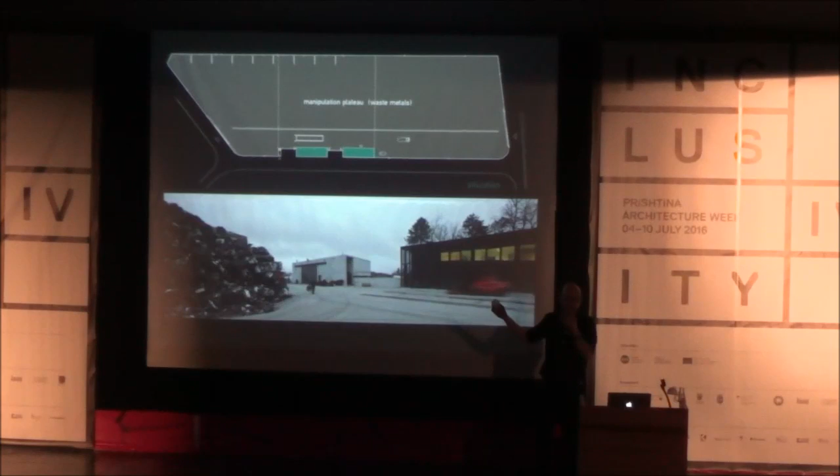What we decided to do is represent, through the architecture, what he is doing. His normal working process is accumulating metal waste, then dividing or selecting the brass from aluminium, from steel, and so on. So the buildings show themselves in two completely different material appearances - this is the representation of the process of how he runs his business.

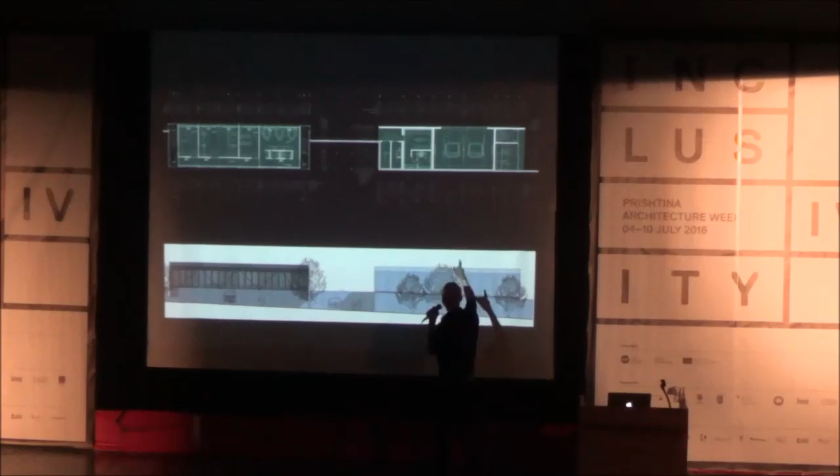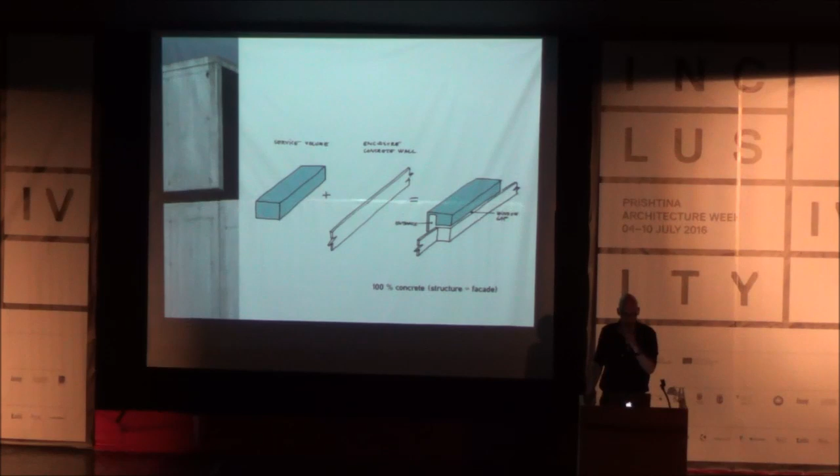The two buildings: one houses the offices and the soft parts of the work, the other houses generic programs used at any industrial facility in this business. The specific one is done 100% out of metal, the structure and facade cladding, as opposed to the other, which leans on this wall and is done exclusively out of concrete. So they show themselves in this way.

The metal mesh works on several levels. One is sun protection, but also physical protection against something sharp or big metal pieces flying towards your window - it hits the mesh before it breaks the window. It also works so that when you switch the lights on, it shows a completely different face to the environment.

Using this simple and rough approach to materializing architecture, we also use very longitudinal elements - the little window providing the minimum amount of light to the service element, and linear elements on the plateau which clearly divide its functions. This creates a dichotomy of two buildings speaking to each other, the same in size but very different in material.

This is also a take on sustainability, since we were thinking that the very specific building here, due to changes in how the business runs or industrial processes upgrade, can simply be dismantled and recycled on site back to its original state, ready to produce something new.

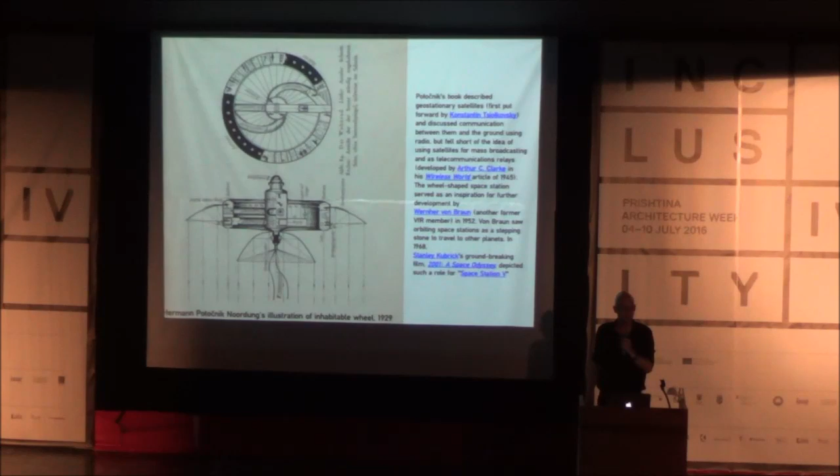With that book, he was somehow an obscure figure in history, but some pieces leaked out, most representatively in pop culture. You must all know the movie 2001: A Space Odyssey, where Arthur C. Clarke was aware of Hermann Potočnik Noordung and his book, and suggested to Stanley Kubrick to use that diagram as the whole scenery for the movie. So what you see in the movie is precisely Hermann Potočnik Noordung's design from 1929.

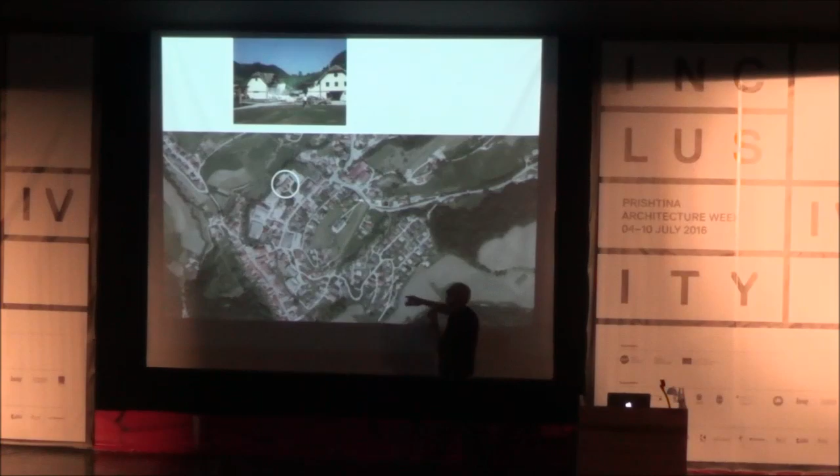Okay, so that's the pop reference to his work. And the other interesting background for our building is that Vitanje, since it was related to Hermann's ancestors, they donated this building to be substituted by this institution. So that used to be their cultural building, where all of the cultural events and local societies had their spaces and happenings. That was demolished in order for this to come in there.

Here we can start to discuss the form, and it's quite clear this was the outset of four architectural offices working together. We didn't quarrel too much because we simply took the circle as the reference to Noordung in order to start designing this building. But at the same time, it is somehow contextual because it differs itself from the rest of the more or less generic built structure, becoming something very specific and different, providing a counterpart to the dominant church. On one side you have religion, and on the other side you have science. So in this way they kind of speak to each other.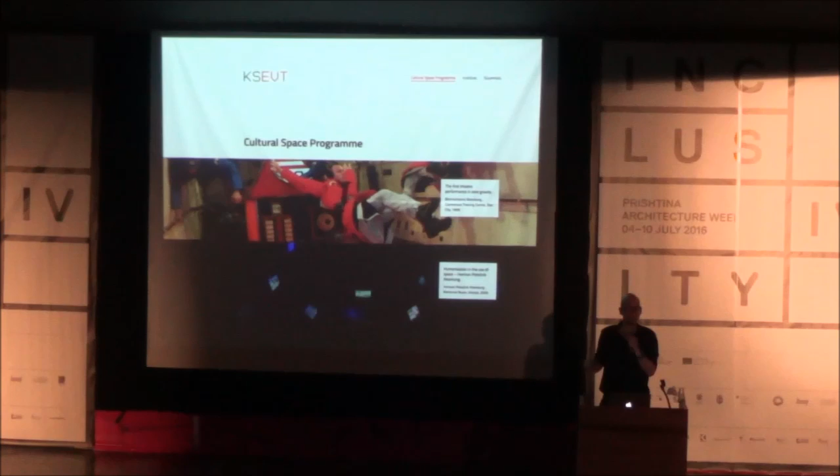So what is the cultural space program that KSEVT, in an acronym, is running? It is addressing the outer space through culture. An important point from the people running this is that outer space was always used or abused either for commercial values or for military value. So we have a perfect opportunity to actually look at it in a completely fresh way, as a cultural entity. Instead of focusing on sciences, they are focusing on art and humanities.

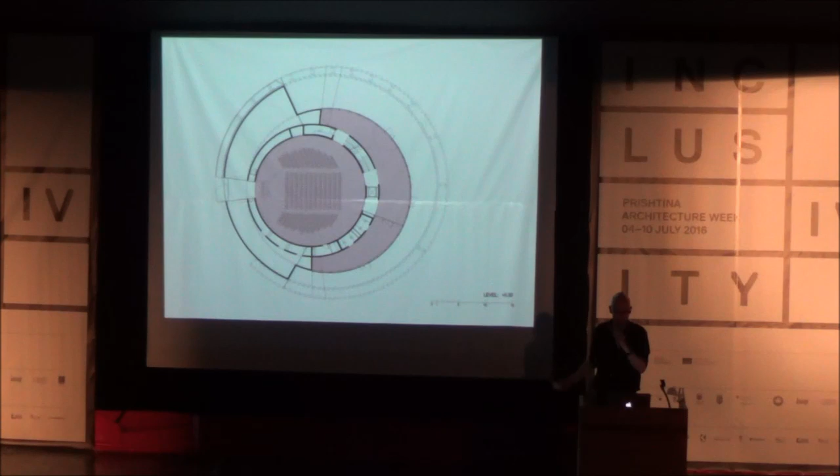So that's the building represented like that, a brief walkthrough with the round hall that is meant to be used for local society events, but at the same time also this kind of space in between, which was supposed to be the local library. The local community is using this space for their own purposes, substituting all the spaces they used to have in the previous building that we tore down. So with events like that, and events like that.

Then when we start to climb up the building, we encounter this space which is wrapped around, meant for the exhibition, which changes every year. It has two, in a way, direct references to what we find in outer space. One is that we never see the end, there is always somewhere continuing. The other is that it is on the ramp, so you don't find a flat surface here.

As soon as you start to walk the exhibition, your mind becomes conscious that your body is disturbed and not totally comfortable with the gravity, because you start to use your muscles in a completely different way. So in a way, it is bringing the very obvious notion of gravity to the forefront in order to start addressing the topic of the exhibition, like that, with some exhibits.

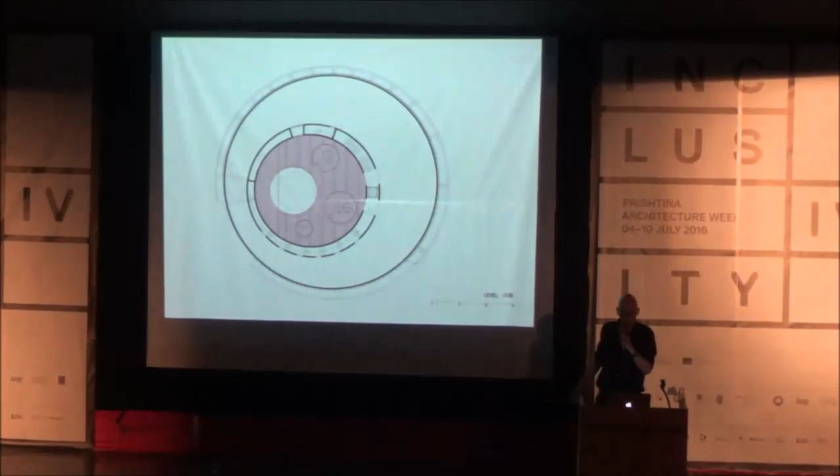And what we find on top of the community hall is space for the researchers, where they can run programs, researchers in residence, with these cylindrical cubicles glazed, completely open to the sky, so the light condition is pretty clear, but also the relationship to the space with the protagonists of the project.

The most important thing from the architectural point of view, but also for showing the exhibition, was how you come from this completely closed and dark space into something which opens up and relates back to the nature, which the outer space is part of as well. So when you're finishing the exhibition, you end your tour on the rooftop, being completely reconnected back to the nature and the little town.

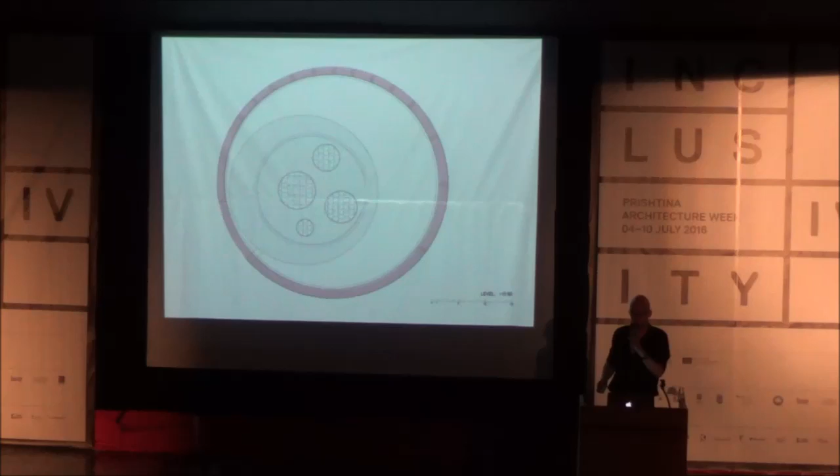But coming down, you never go the same way. We designed a simple staircase that has to be there for fire regulation purposes, but instead of using the fastest way to come down from the roof, we wrapped it around the whole building, so you have this kind of parkour coming down the roof, reaching and touching the ground again through this passerella.

So the interior is like that, very interconnected with the upper and lower spaces, allowing for performances like this, and people's organization in such ways.

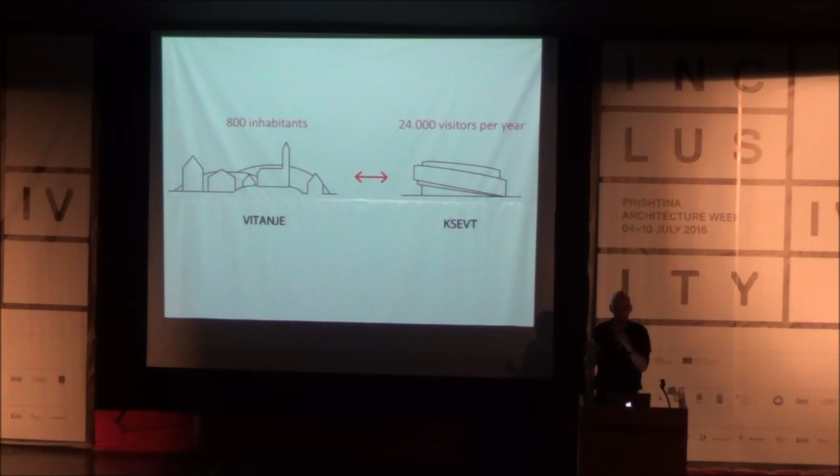So to conclude, what I want to show you is one student project, because I'm running for the third year the AA Visiting School in KSEVT in Vitanje. With this building, some very specific situations happened. Vitanje is a very small village, and the number of visitors the KSEVT provides each year is totally overwhelming. So this kind of situation starts to generate some tension and interesting relationship. So what we are doing with AA Visiting School Slovenia is understanding the topic of nanotourism.

So the 'nanotourism' is a word we've kind of compounded, but it represents the alternative to conventional tourism, which in its mass tourism representation brings quite a lot of difficulties to the built environment and to society.

This is a slide showing all the AA visiting schools around the world. There are about 40-something, including Taipei, Tehran, Tel Aviv, Tokyo, and Vitanje, so the scale can be very varied.

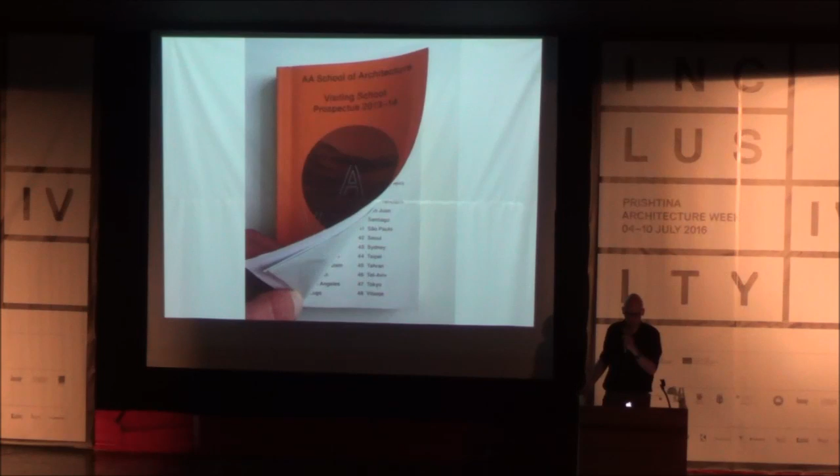Each year we do roughly 4 projects to explore how the school can be something else and give society something different. The projects range from social design, creating community activities around the building, to exploring how the school can become something else entirely.

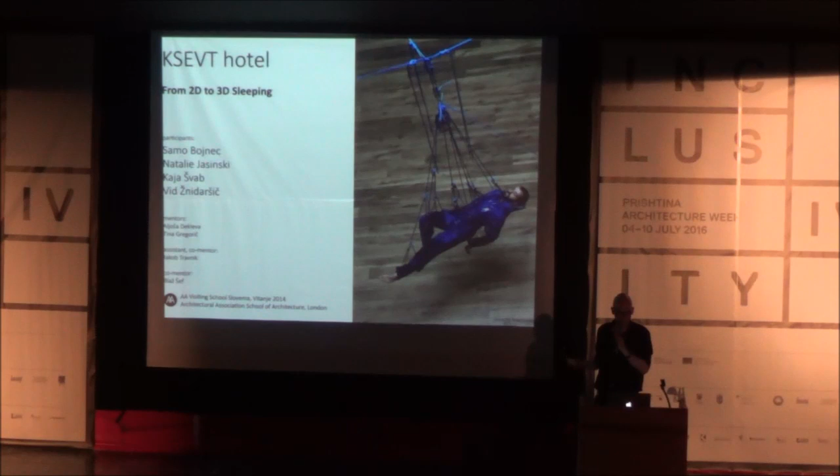To show you briefly: we asked ourselves how we can make better use of underused infrastructures. Museums are genuinely underused infrastructure - they have everything, but close their doors at 6 and open again at 10 the next day, so half the time they're just waiting there for nobody. So we asked ourselves, how can a school become a hotel?

The students started to understand both situations - a generic hotel and something as specific as the school with its content, the whole story of the school including the protagonists running it, but also what happens in a hotel and what kind of situations you find yourself in there.

The other research we ran in parallel looked at what we share together on Earth and in outer space, which are clearly human needs. One of the most basic human needs is sleeping.

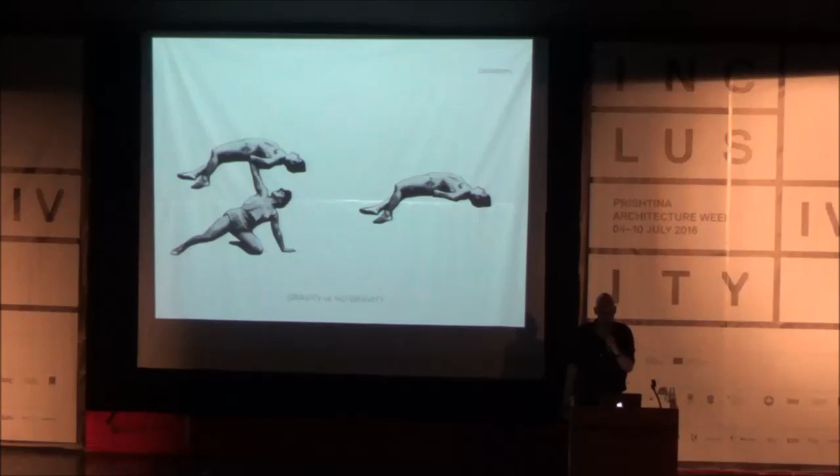We started to research how sleeping can occur in outer space, but also how sleeping occurs on Earth, where different tools apply different ways of sleeping. Understanding the dichotomy of gravity and non-gravity brought us to the notion of 3-dimensional sleeping.

We all sleep during the night in 2 dimensions because our tools for sleeping, the beds, are mainly flat. But clearly in outer space you can position your body in a completely different way, 3-dimensionally, in order to sleep.

They started to understand how we can read the building and what the possibilities are - the movement of the body, our ergonomic conditions, and how we can find ourselves within the specific little spaces of the building.

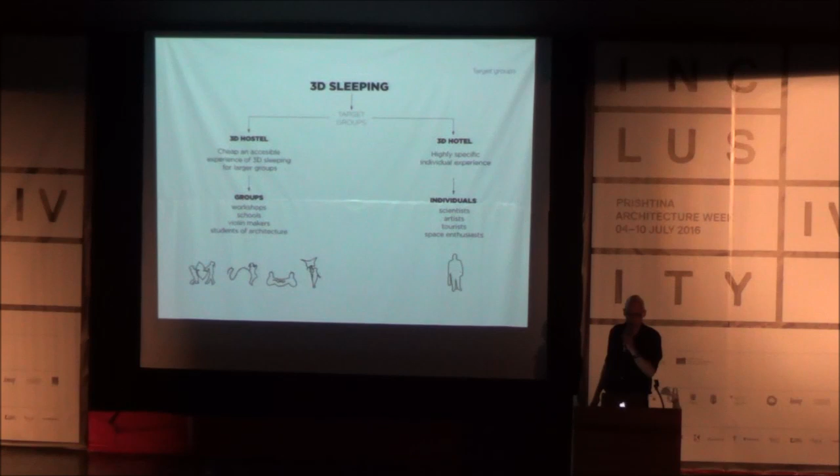They proposed two different project solutions: one collective and one an individual experience of spending the night there. The collective one relates to how you support your body from the bottom part - they created geometrical cushions, and the pyramidal one performed best.

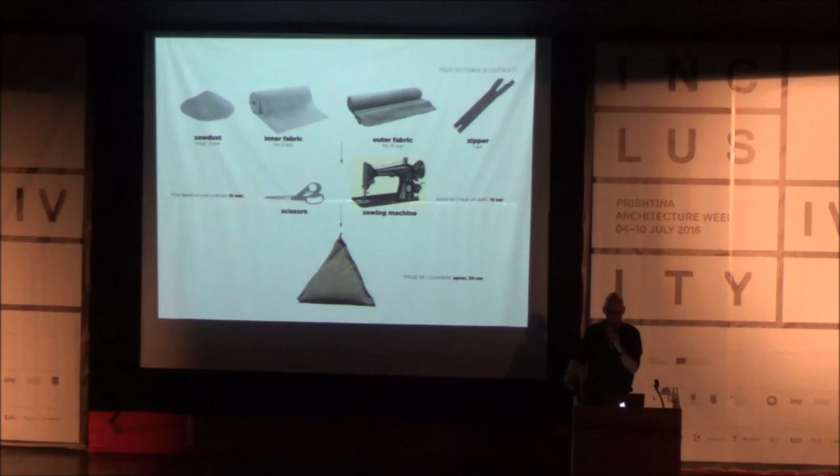In this design-and-make workshop, they produced a series of these specifically made cushions and ran tests on how you can position yourself to have a nap. Eventually you can have this collective experience of spending the night within the building, as part of the exhibition.

On the other hand, the individual experience was engineered from above - how to suspend your body. A couple of tests were run to understand how you can free your body of gravity on Earth, but this kind of hammock situation still leaves your body in a very limited way of positioning yourself.

So they started to research how to hang the parts of your body very individually, in order to give your mobility much more freedom.

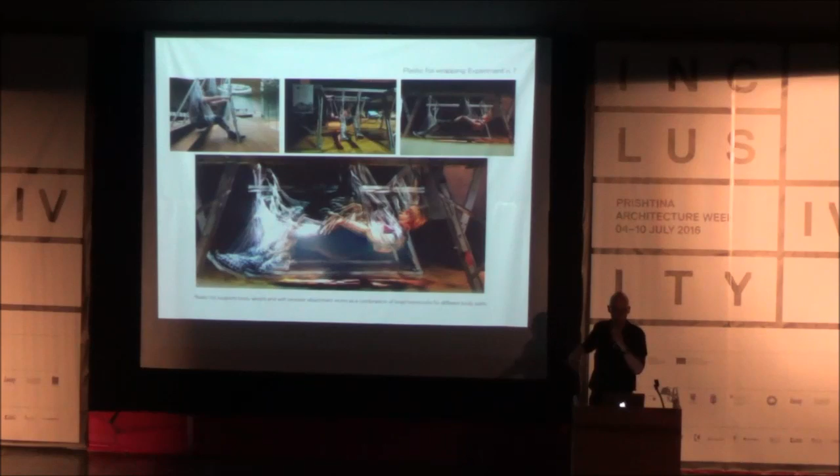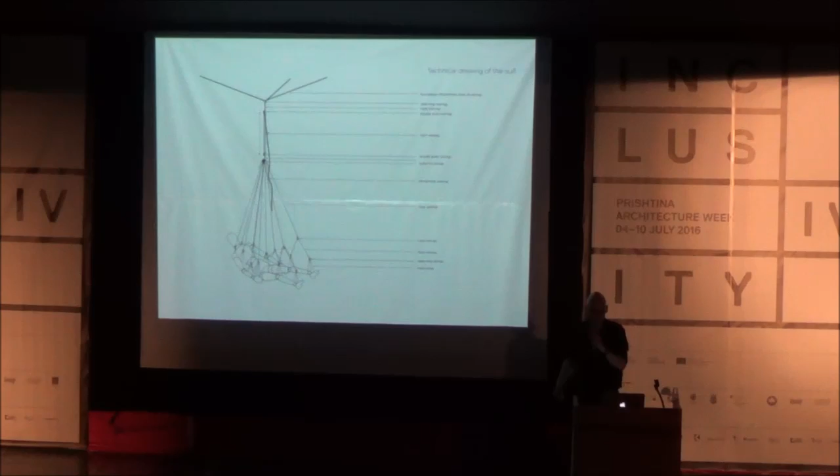The leap forward was understanding that's already a suit we can transform into a series of mini hammocks, with specific points where you can hang your limbs to suspend them. With a system we designed using pulleys, hanging the same amount of weight on the same rope through a pulley, you can perform your body into a very different position.

You can put yourself in a very awkward situation, and it feels very comfortable because you are equally suspended with all your body and limb parts, resulting in situations like this. This is the machine that suspends you, and this is Tina, pretending to sleep. You can put yourself in these kinds of situations, and that provides these kinds of experiences and emotions. So this is it.